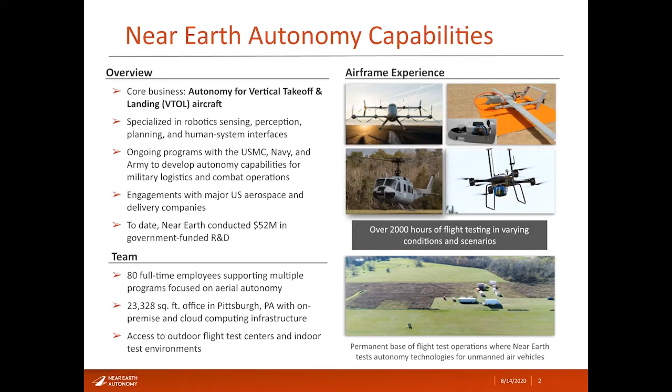in government-funded R&D. We have a team in Pittsburgh of 80 full-time employees supporting multiple programs focused on aerial autonomy, and we have access to a large number of test sites, including an airfield just north of Pittsburgh where we test a lot of our programs. We've been working with aircraft all the way from sub-meter scale to 3-meter scale, and then more recently at 10-meter scale, such as a full helicopter. All in all, we have accumulated about 2,000 hours of flight testing in varying conditions and scenarios.

The key challenge we expect to meet is a requirement for autonomous navigation that would enable safe and reliable aerial operations between ships and between ship and shore. Our eventual transition target is the MQ-25 Stingray, but there are several transition opportunities available that are possible in the meanwhile, especially with rotary wing aircraft. The expectation of our program is that we can provide reduced size, weight, power, and cost that could be mounted to a large number of VTOL airframes, and that can provide optimized multimodal perception systems for robust operations.

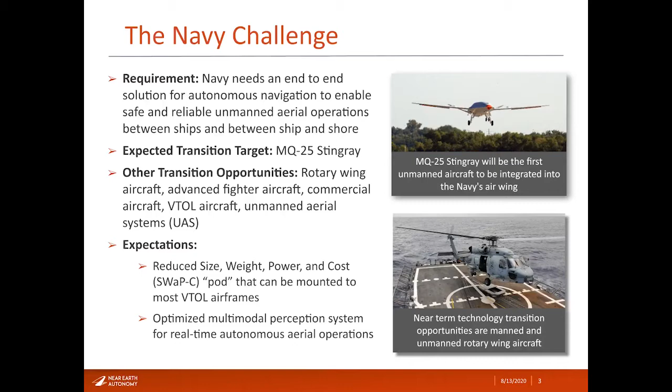As you can see, there are applications in both fixed wing and in rotary wing aircraft, where these aircraft need to very robustly and accurately know where they are with respect to the ship that they're landing on. The key operational need that we hope to address is supplying new forward operating bases ahead of the arrival of Marines, resupplying existing forward operating bases and combat outposts, and resupplying various kinds of ships en route with supplies brought in from other ships or even from shore.

The key improvement that we see is that with this technology, there is no risk of loss of personnel in case of accidents or enemy attack, potential to operate without constant human supervision, potential to operate beyond line of sight that increases the reach of supply chain, and more efficient supply chain by utilizing diverse aircraft classes tailored to specific mission requirements. And as I've mentioned before, there are applications in both rotary wing and in fixed wing aircraft.

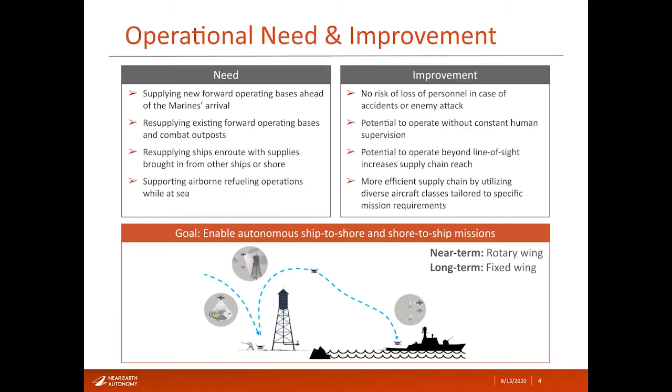We have developed a sensing and computing suite that's shown in this picture here that enables trajectory planning, en route obstacle avoidance, landing zone evaluation, and relative navigation that uses long wave infrared, EO cameras, ultra-wideband ranging, and then scanning LiDAR. This is all in the form of a suite that weighs about 10 pounds and could be attached to many different aircraft to provide these key autonomy capabilities.

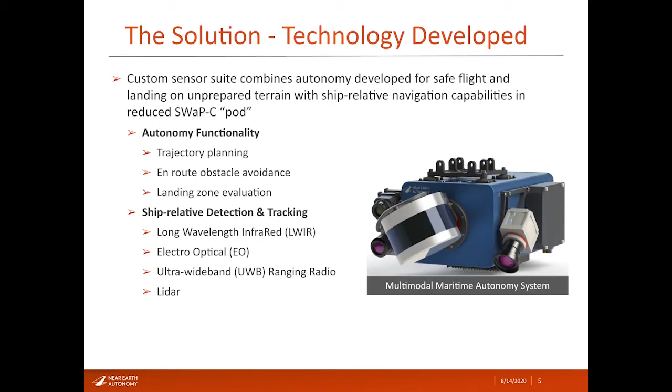Our system has evolved from a large ONR-sponsored program called AACUS from 2012 to 2017 that automated a full-scale UH-1. At the end of the program, we took the key ideas and sensing modalities and converted that into the prototype that I showed before, and have used that to test on slow-moving targets.

Our Phase 2E objectives are to do system development such that we can mature the ship relative navigation that's already been done in Phase 2. We'll do a ship-based closed-loop system demonstration using a relevant UAV and a ship, and create a simulation that shows a 6-DOF model for use in NAVAIR's virtual testbed suite with an ending TRL of 6.

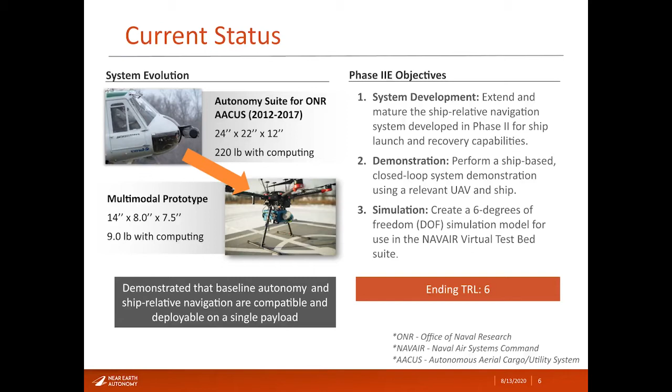In this slide, we show some of the sensing modalities that are resident on the computing and sensing payload. The top left is a thermal image that shows the detection of the ship from quite a distance as the aircraft is approaching. The ship deck is usually a very warm spot on a relatively cold sea and provides a bearing to the ship, even in degraded visual environments.

On the bottom left is an EO image that shows how any of the landing markings on the ship deck can be detected, and the aircraft can get a full 6-DOF relative pose as it approaches the deck. At the bottom is a point cloud that is reconstructed from the scanning LiDAR, and what this gives is not only a relative position to the ship deck, but also some idea as to whether the landing surface is clear.

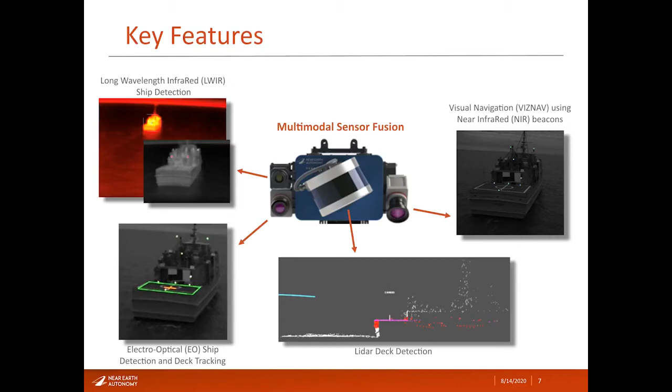On the right is an EO image that is picking up infrared beacons at known locations, and this can be also used to compute relative navigation in the form of a 6-DOF solution. We believe that the most relevant transition advocate is PMA 262, with its need for persistent maritime unmanned aircraft systems. For next steps, we propose to continue characterization and advancement of system performance and capabilities, and to support a field demonstration in a relevant maritime environment.

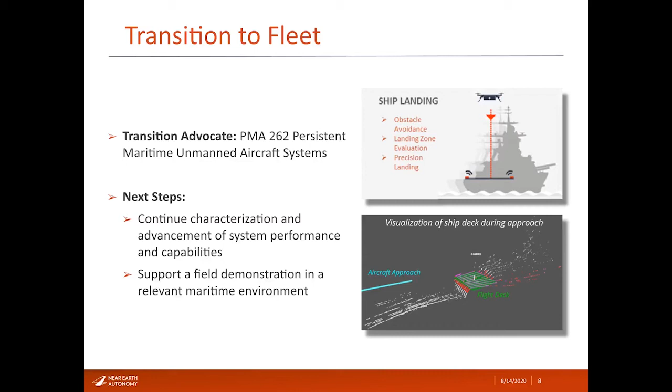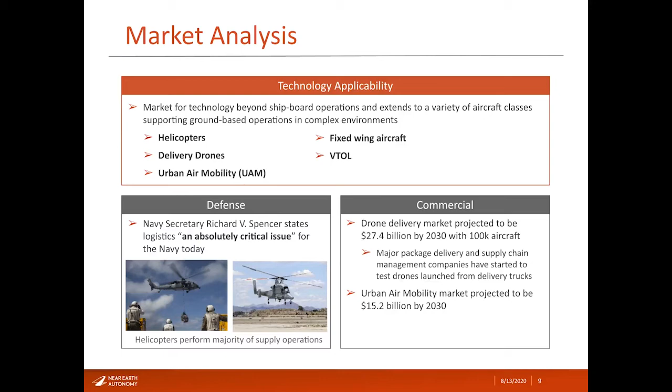Our market analysis shows applications on both the defense and the commercial side. On the defense side, there is a great applicability to autonomous helicopters that are expected to perform a majority of the supply operations. And on the commercial side, we expect that the drone delivery market will be approximately $27.4 billion by 2030, with about 100,000 aircraft needed. Major package delivery and supply chain management companies have started to test drones, and we expect that some version of this technology could be used there. In addition, the urban air mobility market is projected to be roughly $15 billion by 2030.

We're looking for both avionics suppliers and aircraft OEMs as transition partners to bring this technology to the market. The value proposition that we can provide is that our technology will enable unmanned aircraft to operate out of ships of various sizes in degraded weather and visibility conditions, and to enable individual hardware and software modules to be improved or replaced individually without impact to overall system capability.

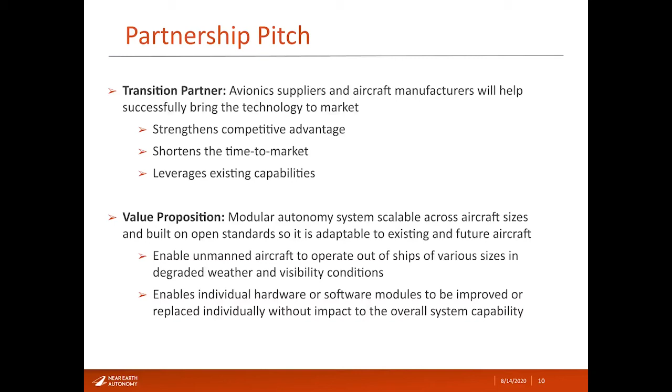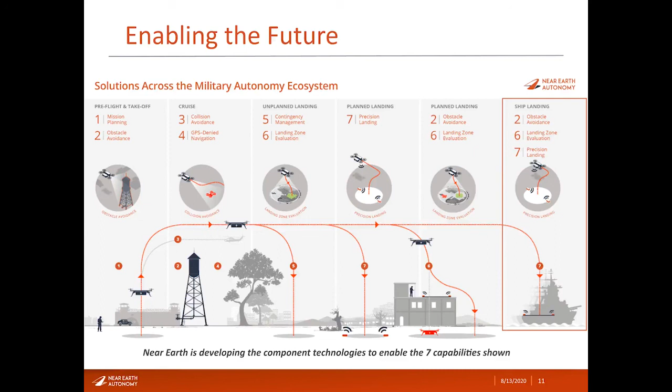GPS-denied navigation to fly in cases of jammed or degraded GPS, contingency management to be able to deal with unexpected circumstances while en route, landing zone evaluation to make sure that the aircraft is able to land safely, and then precision landing to be able to land by quick specification from a person on the ground. Now, these are key capabilities that we are developing separately. They can be integrated or they can be modular.